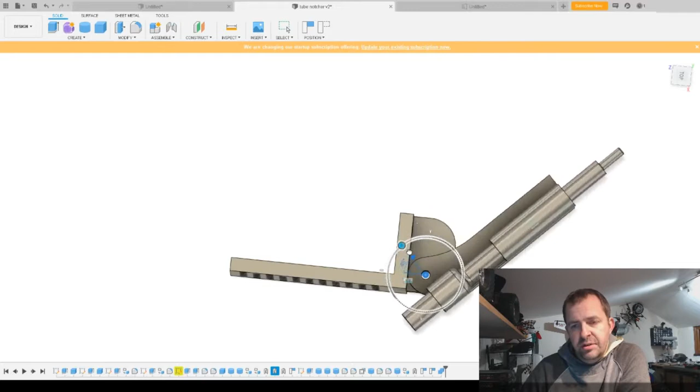That's basically where we're going. You can see it comes back about 15 degrees, should I say. And that'll go right round flat. It will go a little bit further, but I don't know why you would want to. But if I try getting that out of the way a little bit, say you wanted to go right round, you could almost do it like that if you wanted to. Don't know why you would.

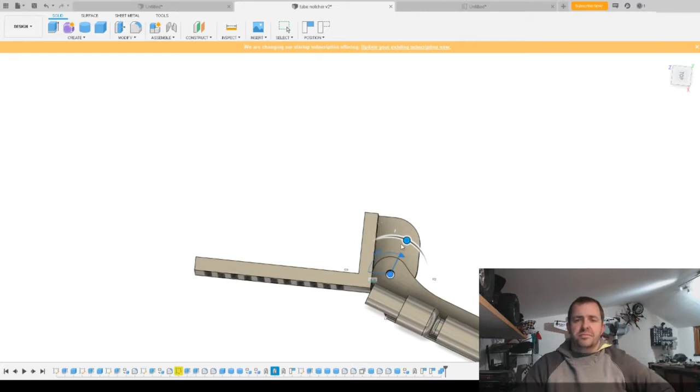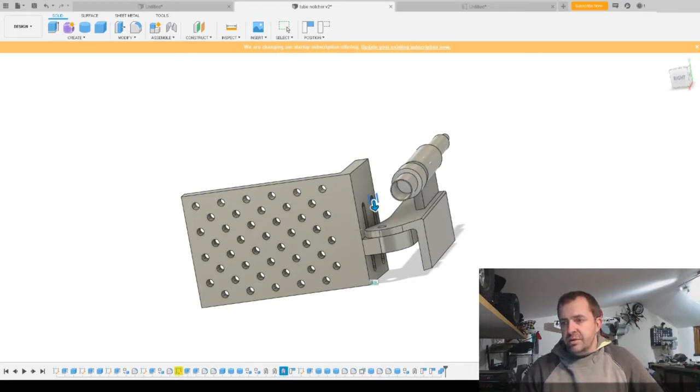Basically the whole reason for me making my own is the lateral vertical movement. That one there. That is going to make it one sweet piece of kit. So I'm making this with a pillar drill, which is shite, shall we say, and an angle grinder, cordless drill, and a bench grinder. So fingers crossed I get to the end.

And I'm going to have a bit of a sweepstake of how many weeks it's going to take me, because I've only got an angle grinder to cut this stuff up. No bench saw or anything like that, no bandsaw. So I might as well buy some angle grinding discs while I'm at it, because I'm going to need them. Anyway, on that note, let's crack on with the build. Yes.

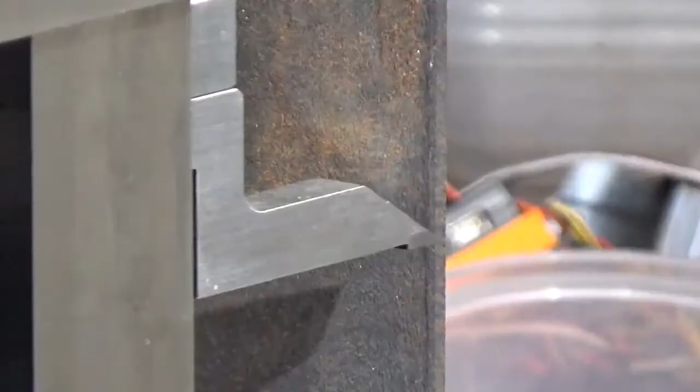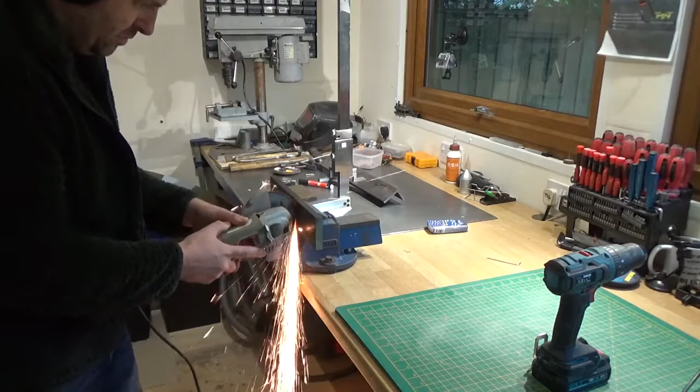This is going to be cut number 1. Starting to smell in here a little bit now, so I'll do the last cut and I'll have to open the door up, I think. It's getting a bit hot now.

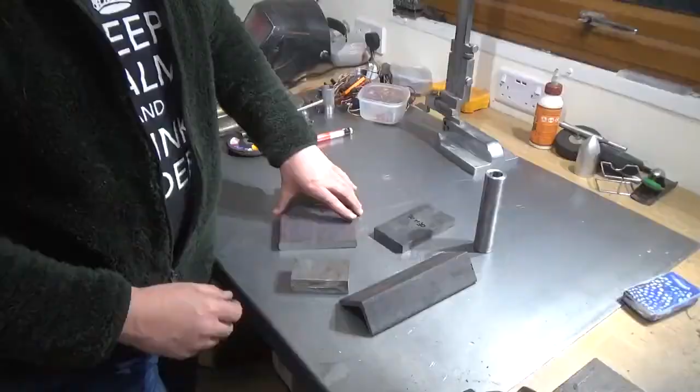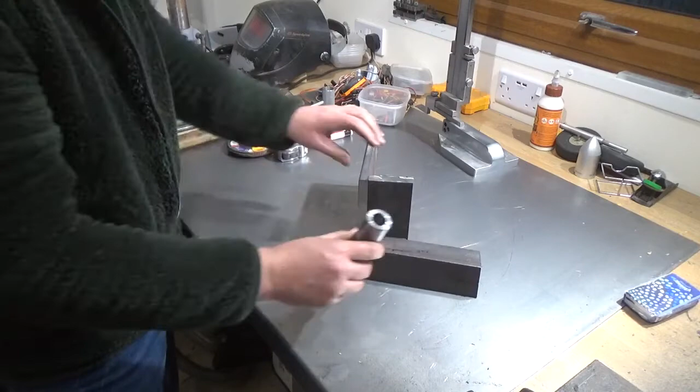We have the pieces here. Those 2 bits will be welded. The height adjustment block, and then the bit that'll do all the twisty right round rubbishy bollocks, and then the main part there. So that goes on there. The non-angle-grinded edges are the best edges. I'll tidy them up a little bit, but I'm really not worried about the edges too much.

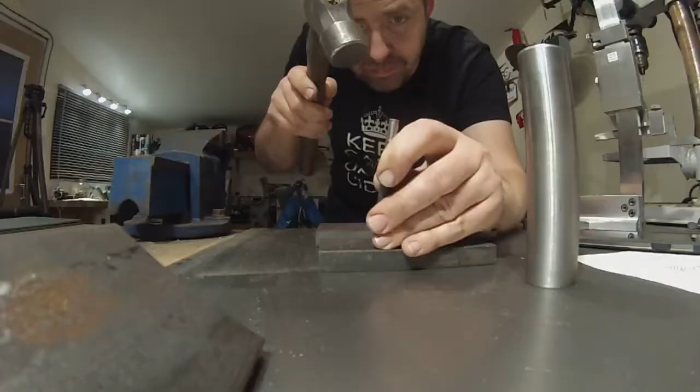What's the chances of this actually being square? Yeah, doesn't actually look too bad, so let's do the first hole. This one's a bit noisy, so cue music.

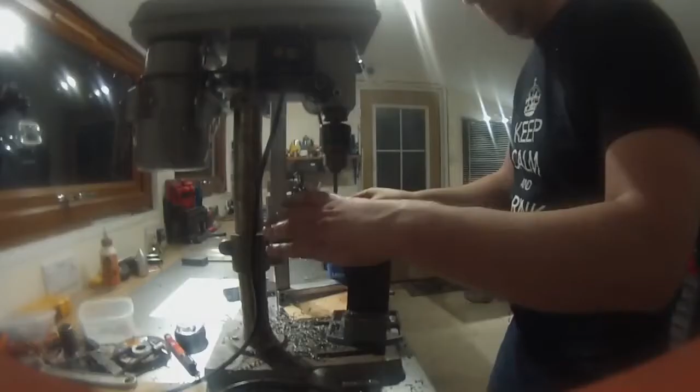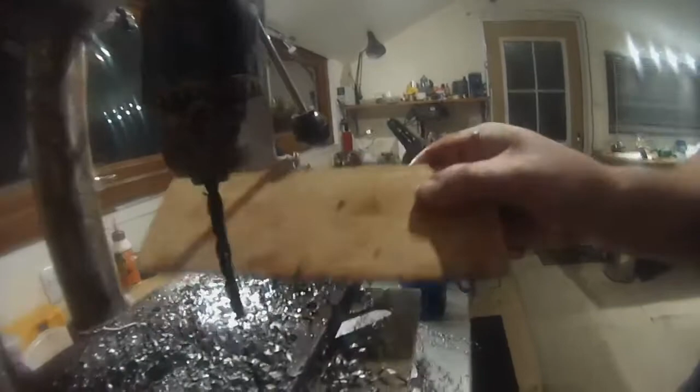And that is just about enough of that. Yummy hands. So what we have here is what can only be described as a bloody mess. So that's the hole plates. Still got to open those up to 8.5 for an M10 by 1.5 pitch thread, and then tap them all. Yay!

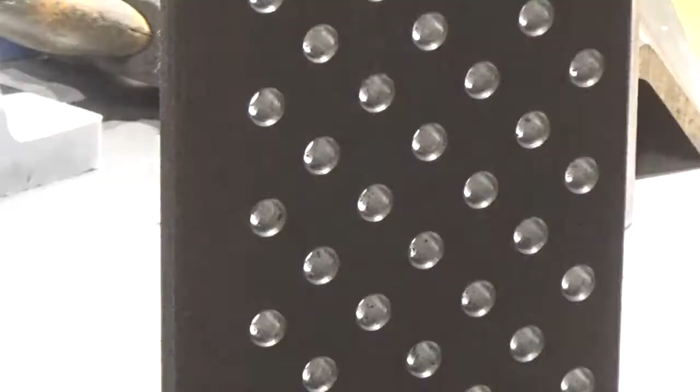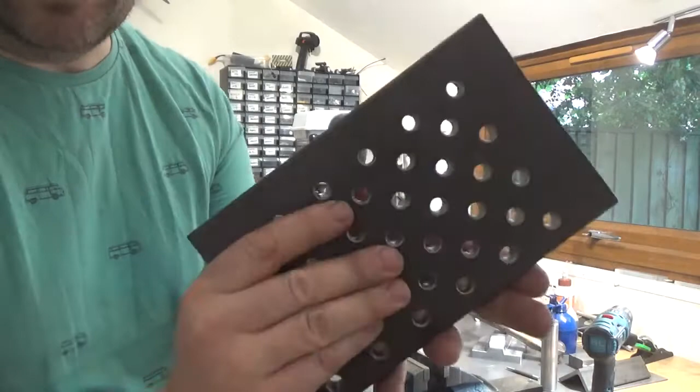Hi. Day 2. Found safety glasses. Never do angle grinding or drilling without safety glasses. Right, first part's done. That's the main plate with the jigging holes. Obviously I still need to tap those, but that was about 2 hours worth of drilling on that one part, so I'm leaving the tapping until later.

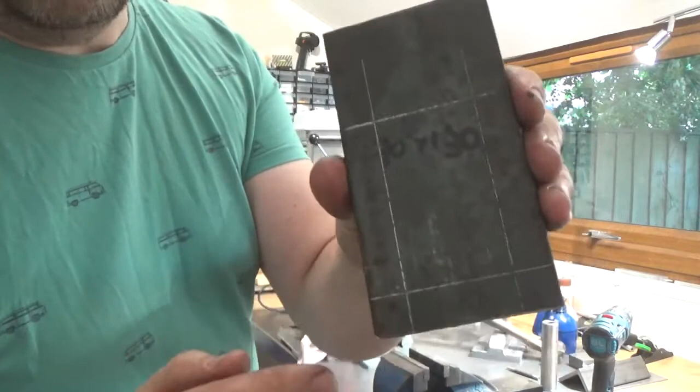I'm starting on the next block, which is putting the slots up here. I've got the 2 end holes I'm going to drill first and make sure those are 10mm before I start doing the slot, and then drill out the rest, file the rubbish out of it, and see how well that bit turns out. Here we go. Drilling marathon, take 2.

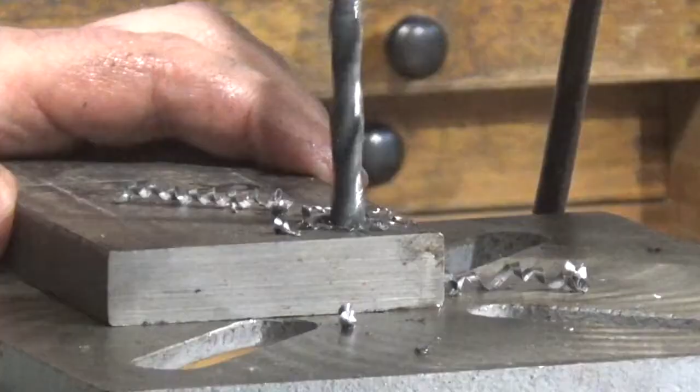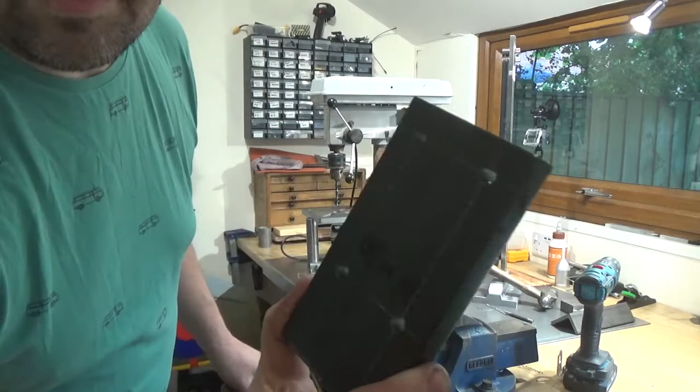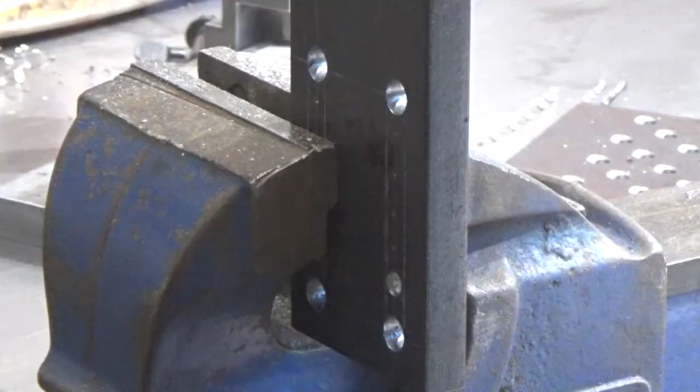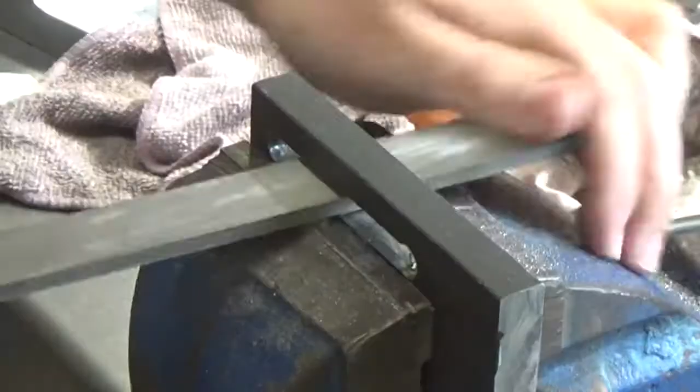So I've drilled the 4 main holes. I'm going to open those up to 10mm, just so that's a nice rounded end before I start doing anything else. So I've changed my mind. I'm going to angle grind that out. I'm just going to see what happens, and might have to make another one afterwards, but that's what I do. That's just the nature of YouTube.

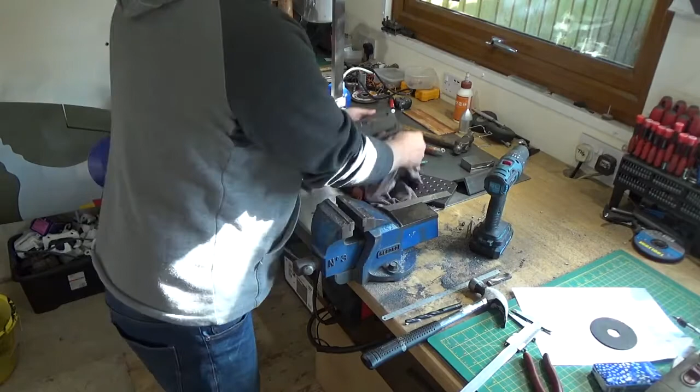So, here we have, really got to stop saying so, just adjust the camera. There we go. So, did it again.

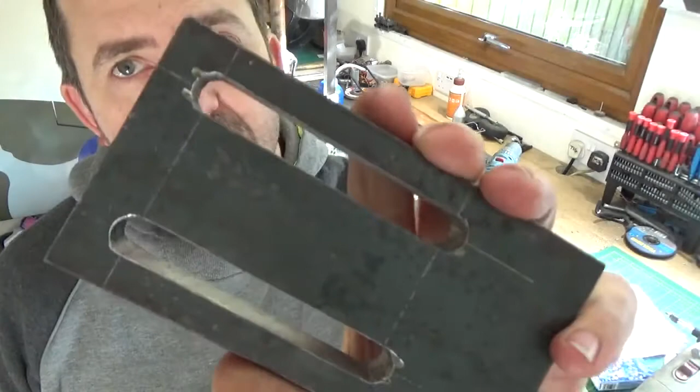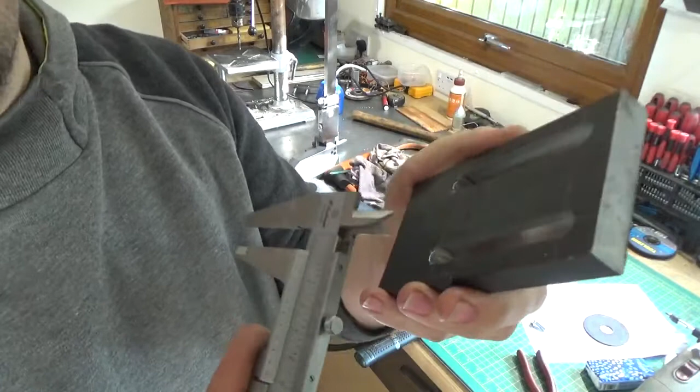That is the slide plate done. Lovely jubbly. I'd say just about 2-3 hours of hand filing, and we're looking at bob on. Is it going to pick that up? Probably not. Bob on 10mm, and obviously the most important thing is the pitch when doing a dual slide, and that is bob on 50mm. So that's a win.

Take this off. So that's the basic shape. I'm gonna round it off. I've got my bench grinder, give it a go with that. Tidy that up, then we just got to drill the hole. Yay!

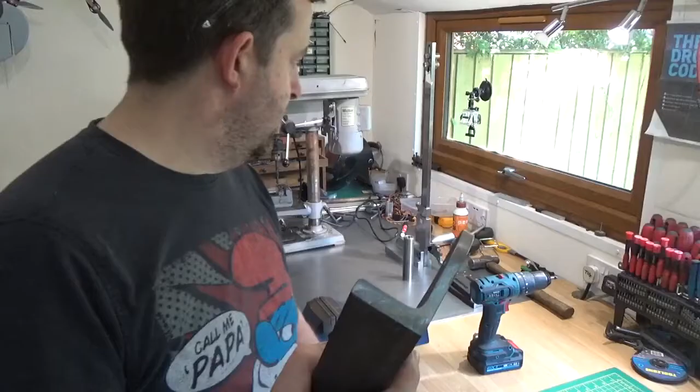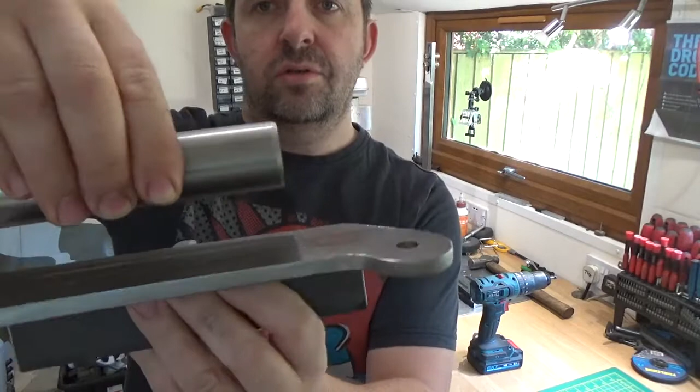The third piece, that's going to be like the swivelly bit with the guide on the tip there, on the top, kind of swings out and stuff. And that's one of our cats.

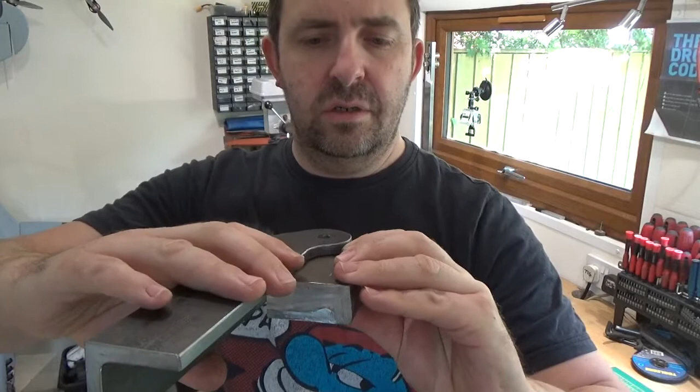Yeah, so pretty pleased with it so far. Obviously that's going to be the bolt hole that we need to tighten up. So the last piece of the puzzle, that bit, I'm going to need quite a nice threaded hole in there, so I can pinch it up tight to stop it changing the angle.

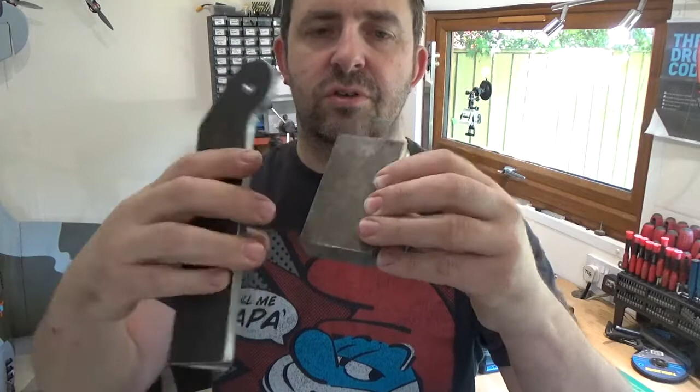Haven't quite decided how I'm going to do the angles yet, but I might just get the protractor out and do some scribes on the top of this block. So we need to radius that back corner off, which is going to be probably the worst job. And then drill and tap into there as well, so it lines up with that bit.

So, we are making progress. I've got like a million holes to tap, so I'll do that at the end anyway. And yeah, let's crack on with that bit. Yeah, it's pretty square. Square enough I can live with it anyway. Use the old height gauge, so 15mm.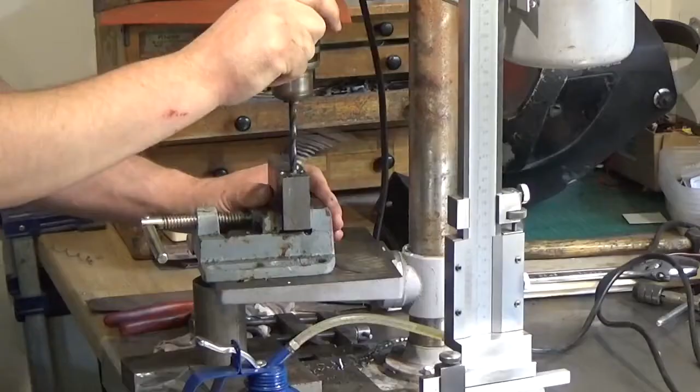Okay, so I've reached the bottom of that hole. Went down to about 45 in the end. And you'll notice when I'm drilling, I'm stopping and starting. Basically that just breaks up the chips. So rather than having massive long piggy tails, you get smaller piggy tails come off, which are more manageable, and they don't get wrapped around the drill.

So here we have first two holes, 8.5mm, about 45mm deep. So that's the third hole drilled. So we're going to go and tap those now. Need to just chamfer the top of the hole. Basically a small countersink to suit what you're tapping.

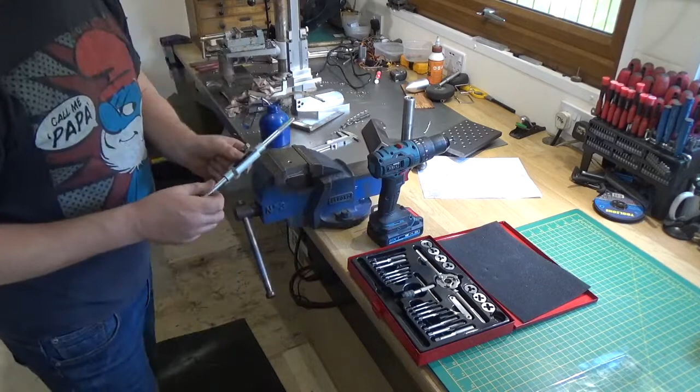Sorry about that, just been raided by the kids. So here we go. And now the cat's come in.

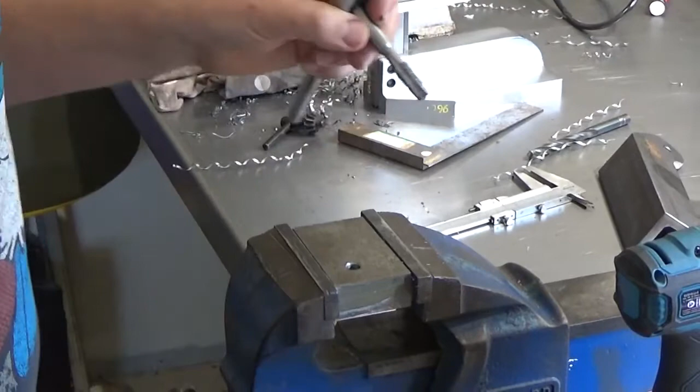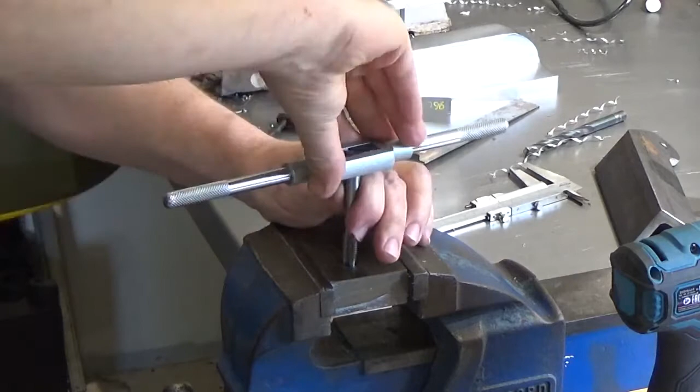A little bit of oil on the tap, just a splash. Possibly wouldn't hurt to put a drip down the side because it is quite a deep hole. Little dribble. Then the first few turns are the critical ones. So stand back, make sure you're level. And again, same as the drill, it's always best to back turn a little bit. Just breaks up the swarf so it comes out easier.

So it's quite a deep hole, this one, and you can usually tell you're through because it gets a bit easier, and that's as far as that tap will go anyway, because this block is basically 25mm thick. So there you have it. A beautifully tapped hole. So you need to chamfer the back off. Again, fancy word for a small countersink. Yeah, quite pleased with that. Looks quite tidy all the way through.

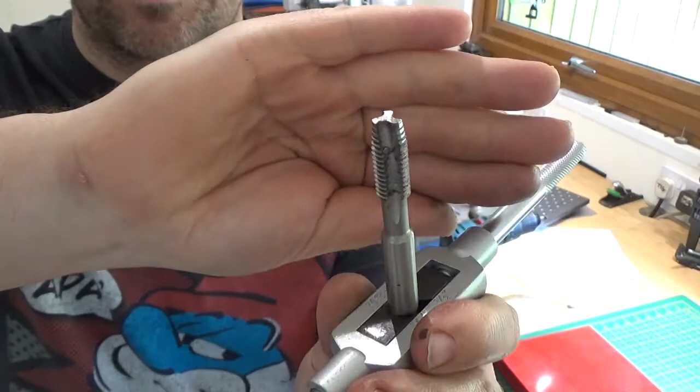So now, for those two. These ones are going to be a little bit more difficult because these are blind holes. And in an ideal world, I would have a spiral flute tap, which then as you're tapping in, the swarf comes out the top. This is all I've got, so what I'm going to do is just basically do it a bit at a time.

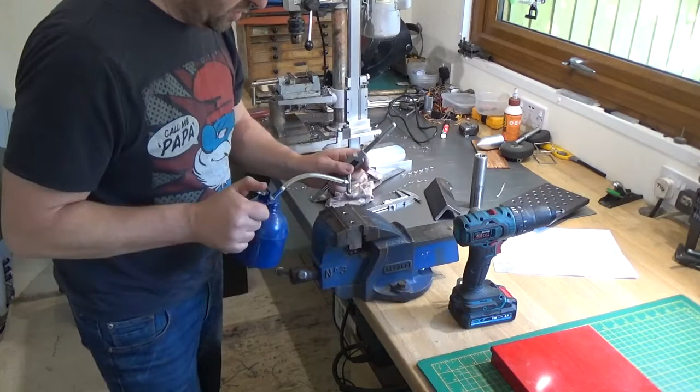Again, small countersink, chamfer, as you want to put it, tap of oil. So, there we have, wait for it to focus, tapped holes all the way to the bottom, then that one there. So what I'm going to do, since I've got the tapping kit out,

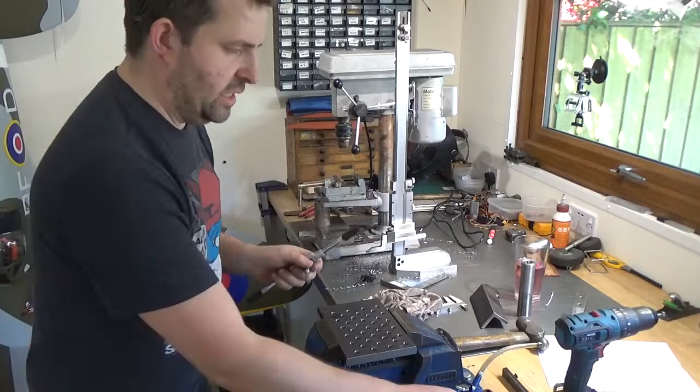so I've tapped a few holes now. Feels like a million, but it's not. And the knurling was starting to dig into my hands. So I've just put some bits of rubber pipe on the end. Hopefully that should help. You've joined me on the last tapped hole of the plate. Probably only been probably an hour. Job done.

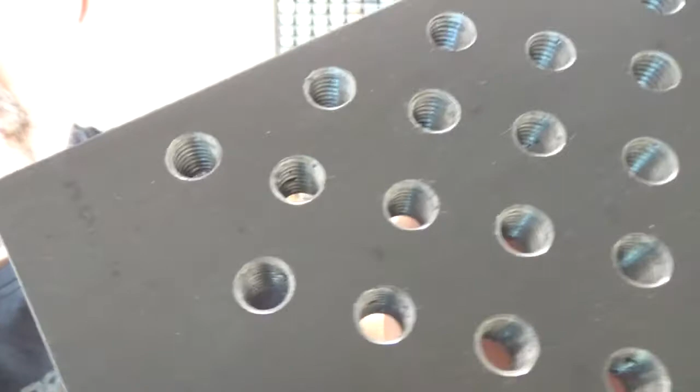That is a lot of tapped holes. But good job. I seem to spend more time tidying up than I do actually making the damn thing.

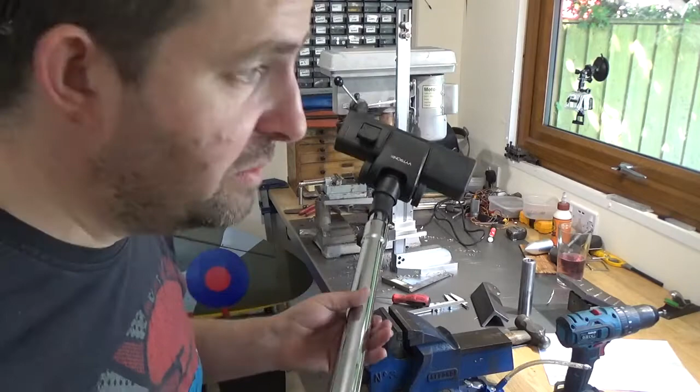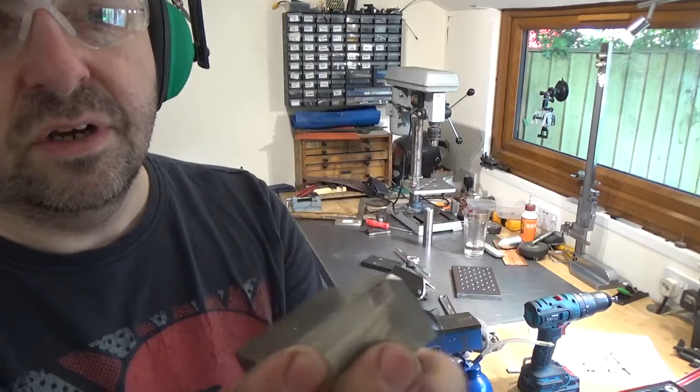So I've marked up the block. I've done a test fit, that's what those swirly marks are. Just going to cut the corners off to where we need for the extra swing. Those edges, they're not perfect, but it's good enough for what I want it for. This will be the second test fit. That took as long as I thought it would.

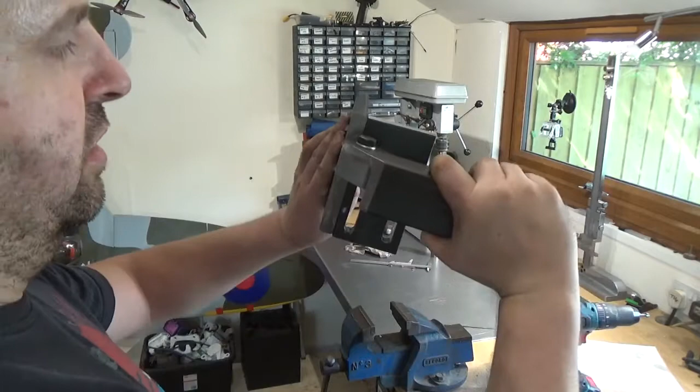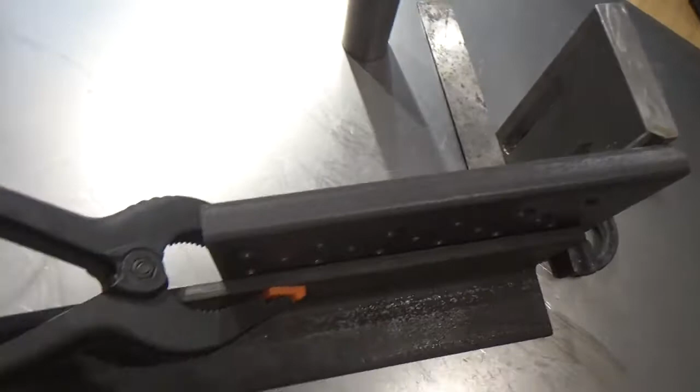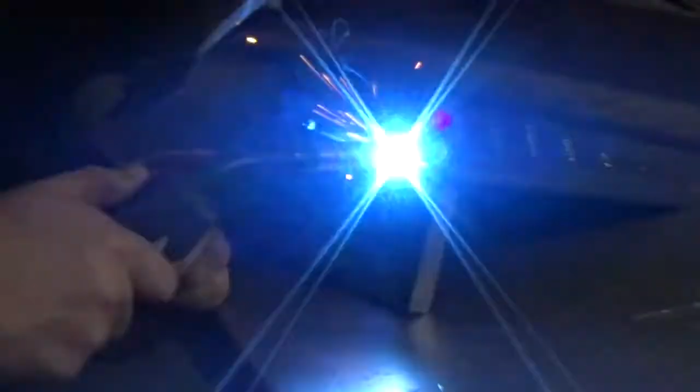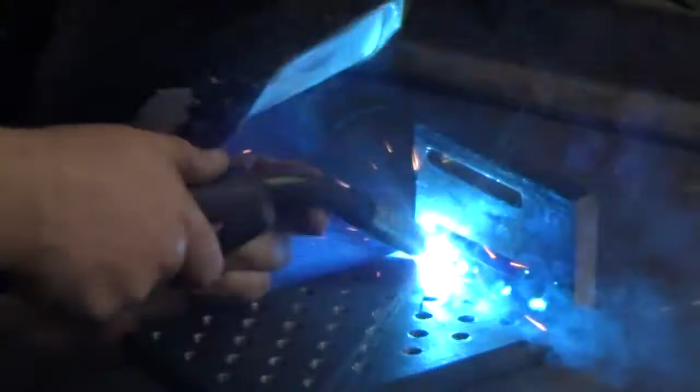Just need to weld the two together and voila. So I'm just getting it ready for welding. Just jigging it up. Making sure it's all square. And annoyingly, there's a little bit of a gap at the top because that side block isn't completely square. So I'm going to cool this down before I melt my hand. I'll see you guys in a sec.

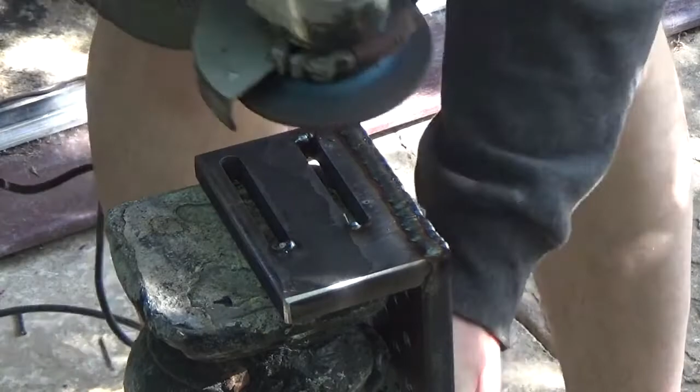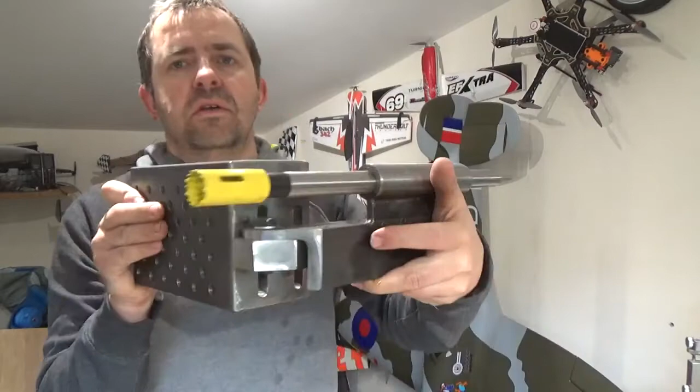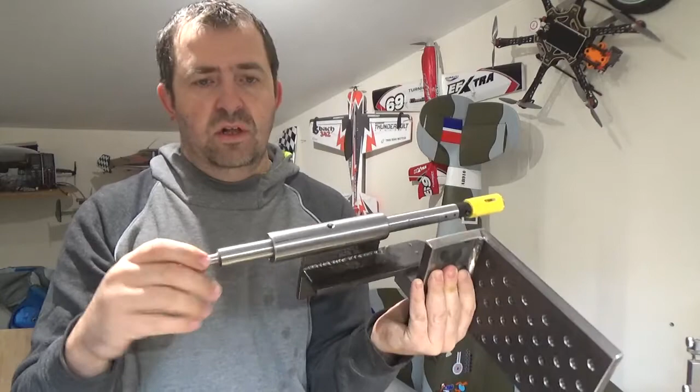Right, the story so far. This is where we've got to so far. We've got the main block, slidey plate. Had a slight issue, as you probably saw in the last 10-30 seconds or so, that the shaft seized. So basically I just had to hand ream it back out again. So that's all nice and smooth now. And I've managed to get the grub screws turned up for the end, so that's nice and tidy. Really happy with that. That's all ready to go. And it was getting a bit heavy.

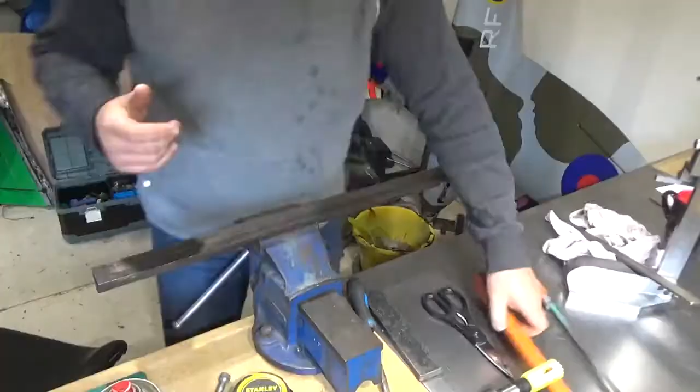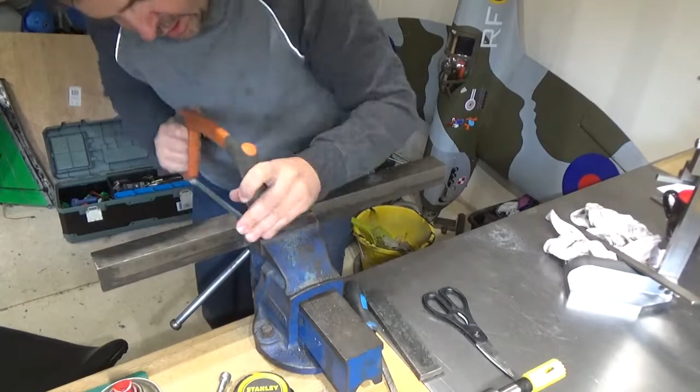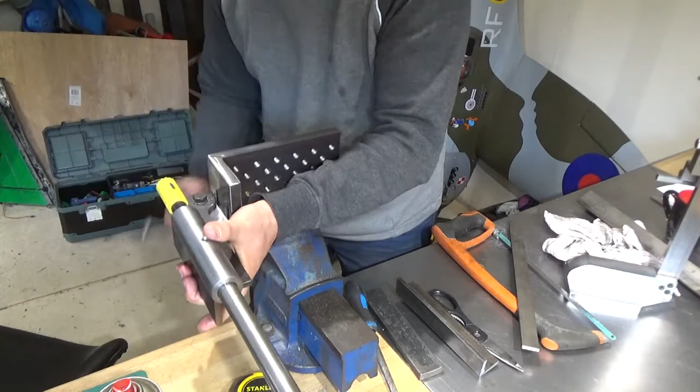The next part is making the V-block. So one side. Voila. Right, so now I need to work out where the center line is going to be in one particular position.

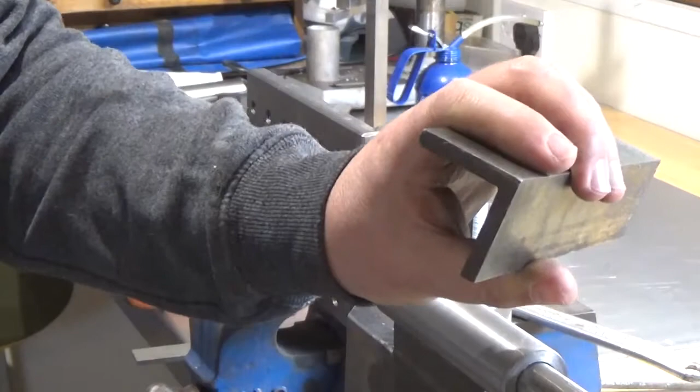What I need to do now is get this in a 45-degree angle against the plate and in the centre line of the main shaft. So that's just sitting there quite well, which is a bit of luck. But this has got to be perfectly aligned to what the shaft is doing because of all the different angles I can do. So I've got that locked off right at the bottom. Excuse me. And just need to get that in there level.

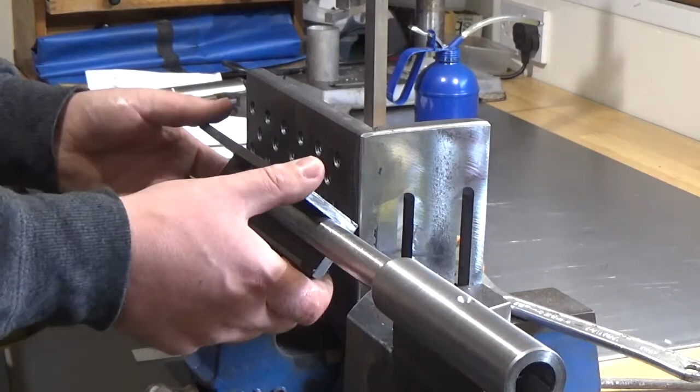Right, made a bit of a boo-boo. Forgot to record that. There's no way I'm doing it again. Just filed those two slots in there. Got a bit of a sweat on my brow, as it were.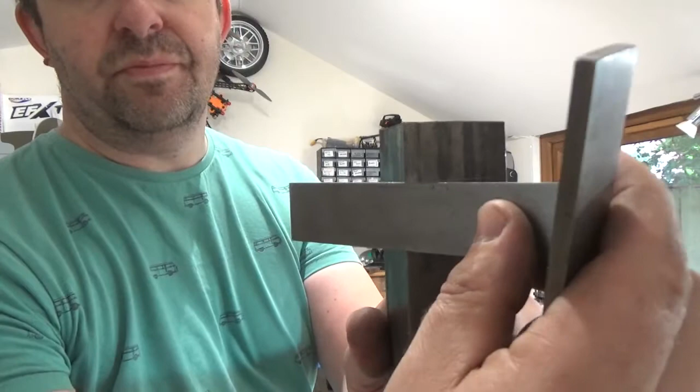And some of those should tie in there quite nicely. So basically these will slide into the back, bolt those in position when they're now a fit with a bit of a tap, and then I'm going to weld those up in position as well. That one is a little bit snug. That one there. At least then I'll know the exact position for the centre line of the... right.

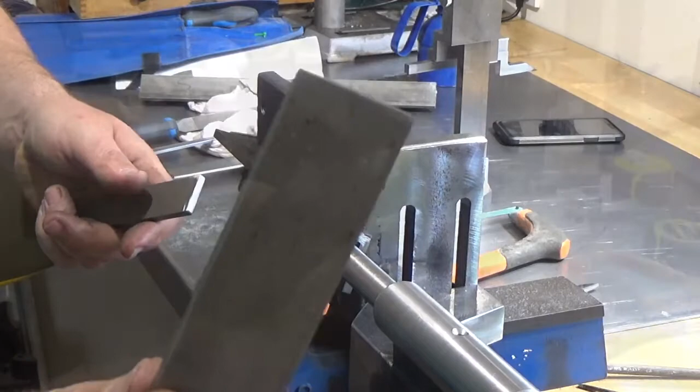So I need to drag the pillar drill out now and get those holes in. There we go. 4 holes. Okay, so as usual, I can only find 3 bolts. Right, snap it. Now basically you've got to get this in so that slides past. There we go. So that's miles off at the moment.

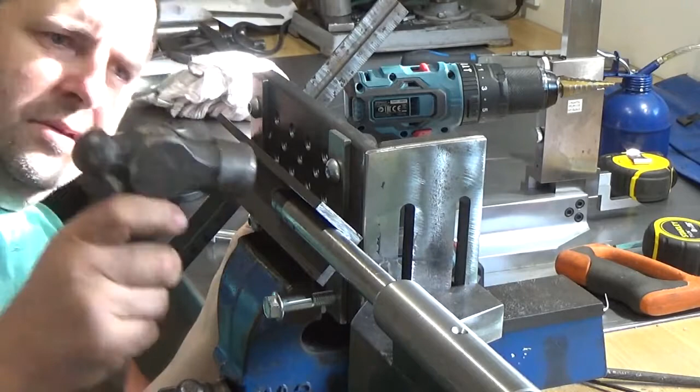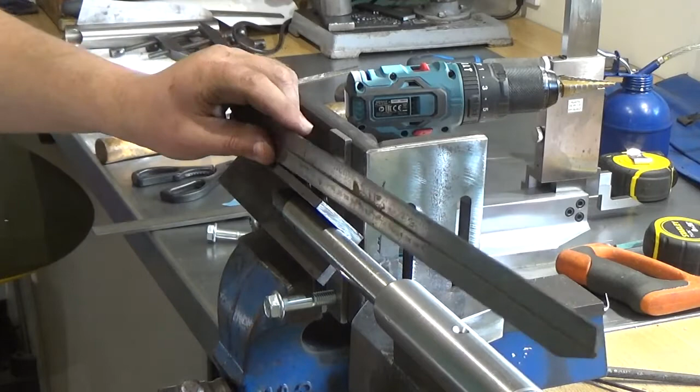Let's get a longer straight edge. So that's sitting on top of the angle. The gap along there isn't bad. I suppose I could try and measure it, see if it's perfect. So we're talking 12 now. 11.9, so 0.1 mil. Pretty sure I can live with that, and if I weld this bottom edge first, that should pull it down anyway.

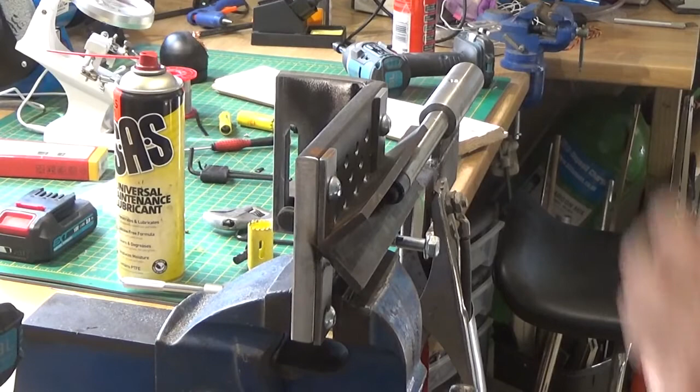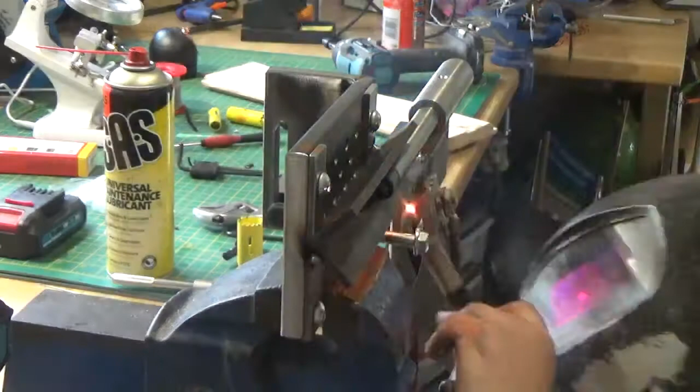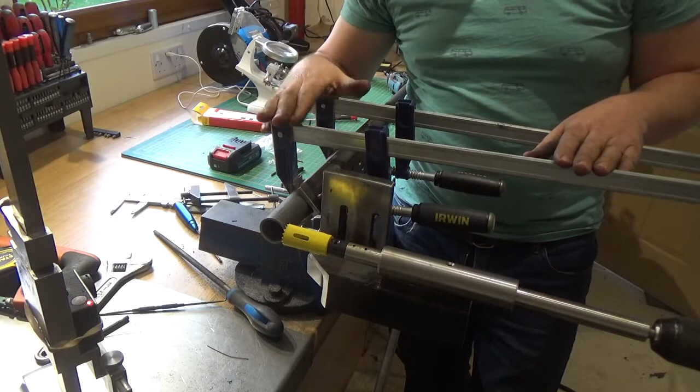Right, so what we've got here, I have to put sash clamps on it for now. I'd get a couple of dedicated G clamps at some point. 1 3/4, possibly 1.5 tube, 1.5 and it's at least a 3mm wall. Yeah, it's 3mm wall, so it's quite a chunky tube really, so it's probably one of the worst things I'm going to be cutting on here. And let's see if she goes. Hopefully she doesn't seize up this time.

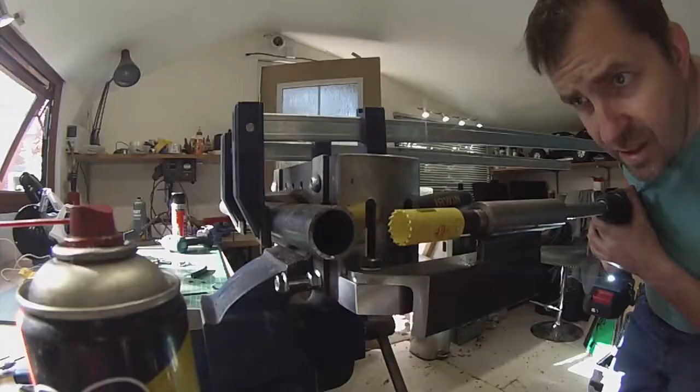Right. Now I found the problem, a little bit. Squirt the old good juice. And that is a win. So that is it for now. Still need to cut a couple of bolts for the V holder. Slide's working well, doesn't seize this time. Mainly because the welding distorted it. I needed to ream it back out again.

Adjustable slide, adjustable angle. That was quite a chunky tube. And it seemed to cope with that alright, and it's gone straight down the middle. So that's a win. Put 2 clamps on this one, mainly because it's quite a chunky piece of tube and it's the first time using it, so when I start doing lighter stuff, I bet I could probably get away with just the 1. And yeah, you will see this in the future being used.

And I need to make the next one. It's going to be a box folder. I want something to fold up thin sheets of metal. And so that's going to be the next one on the list.